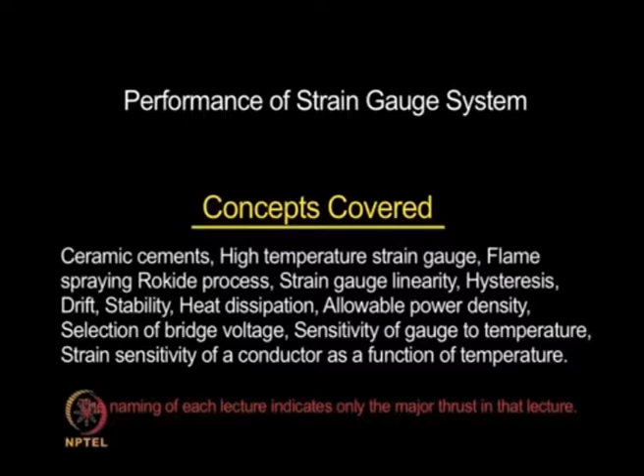Let us continue our discussion on strain gauges. We have looked at in the last class strain gauge as a system consisting of the metallic grid supported by a carrier and which is bonded to the specimen by a suitable adhesive.

We have looked at quick setting adhesive like cyanoacrylate. Then we looked at epoxy, which is meant for sophisticated installations like in transducers, where you need to provide a very thin bond line, and also it should hold up for longer periods of operation. Then we looked at polyester adhesive.

Now, let us look at the ceramic cements. They are useful for high temperature applications or in radiation environments. Nuclear power is becoming very important, so you need to live with radiation environments in such installations, and in such applications organic adhesives cannot be employed.

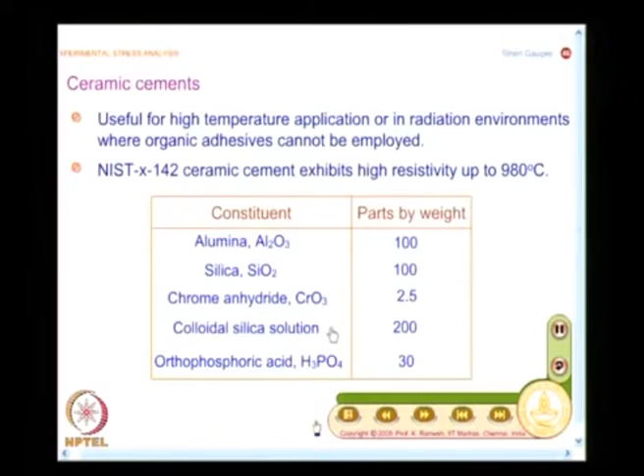So, what you have here is a blend of ceramic powders such as alumina and silica combined with phosphoric acid, mixed with a solvent such as isopropyl alcohol and an organic binder, to form a liquid.

So, essentially you have this ceramic available as a liquid, so that it is easy for you to apply it by a spraying process.

On the specimen you provide a pre-coat of the ceramic cement. After application, it is fired to form a thin layer between the gauge grid and the component. So it is a very elaborate process; you need proper training to handle this kind of special cement.

Once you form a thin ceramic cement layer on the specimen, you place the gauge, and the gauge is also very special—we will have a look at it a little while later. You have to remove the carrier of the gauge and place it on the thin layer of ceramic.

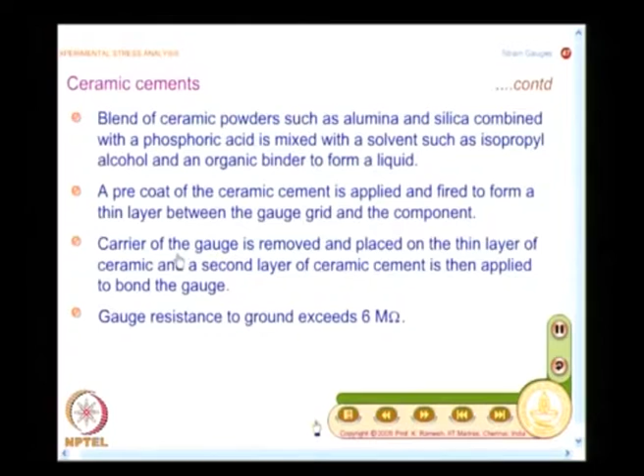So what you see here is you need to have a strain gauge such that its carrier can be removed. You have an example of how such a gauge can be constructed—I have a sketch here.

I essentially have a wire type strain gauge, and you have a Teflon tape carrier which could be peeled off. Let me make a decent sketch of this. Gauges are constructed with a grid fabricated from wire, which is mounted on slotted carriers made of glass reinforced Teflon tape.

The reason you have the slotted type is that you put a layer of ceramic, then the strain gauge would be bonded. At that time you can remove this Teflon tape, then again apply a coat and complete your installation.

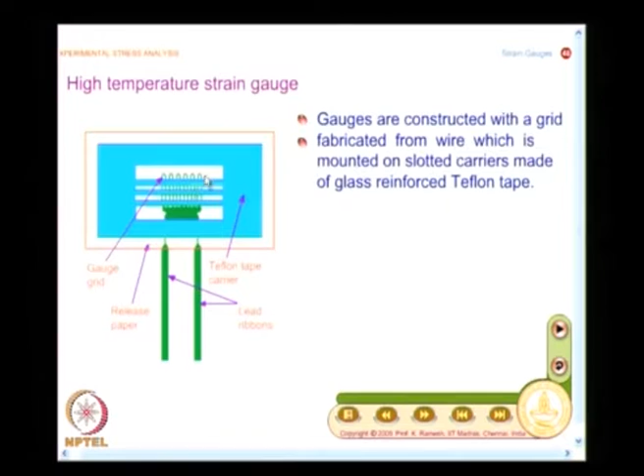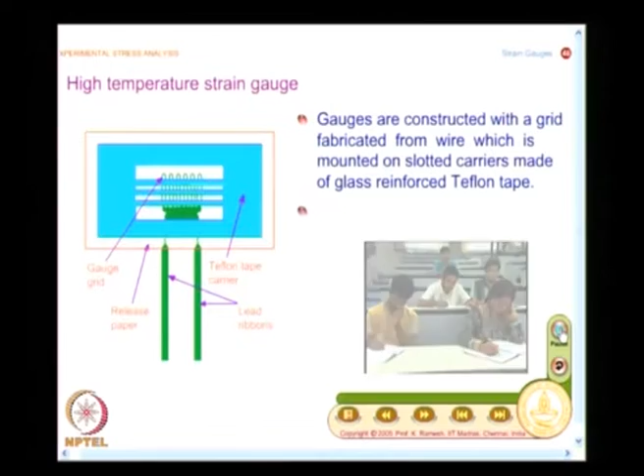In order to apply the ceramic, you need a special gun. As mentioned earlier, the tape is removed after the grid is secured to the component. So it is a very involved process, not like simple strain gauge bonding. Since you work at very high temperatures, you need a systematic procedure.

Here we look at one family of strain gauges used for high temperature. There are also weldable strain gauges which we won't focus on now, but you should know that for high temperature applications there's another form of strain gauge that can be welded to the base material. Here we only look at forming a layer of ceramic, removing the carrier, and putting another layer of ceramic so the gauge is properly bonded, and such gauges are available commercially.

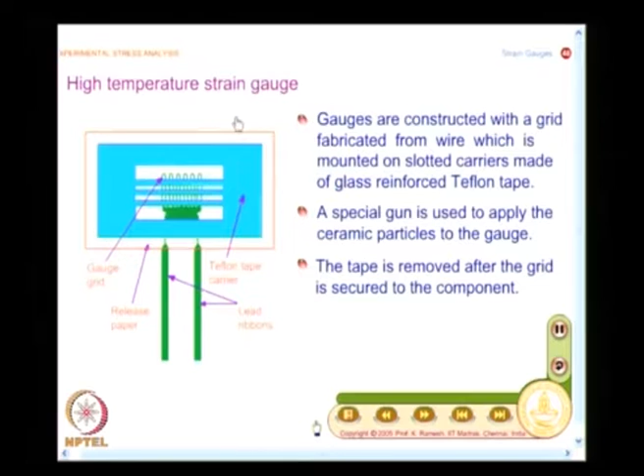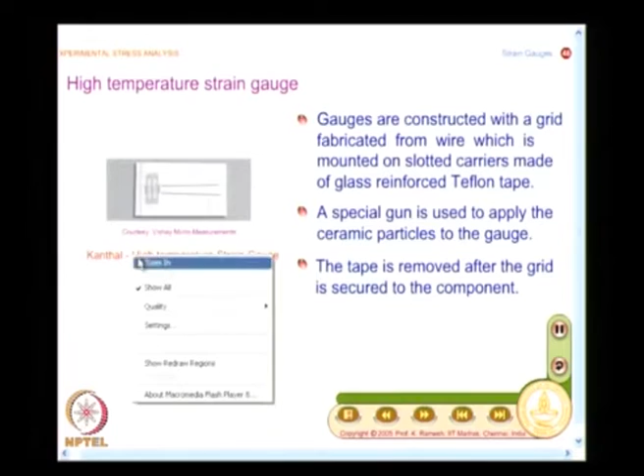This is given by Vishay Micro Measurements, and they have what is known as Kanthal, meant for high temperature strain gauges. You can see the slotted Teflon tape carrier, and the strain gauge available like this. So this can be used to put the ceramic cement, remove the carrier, and put another layer.

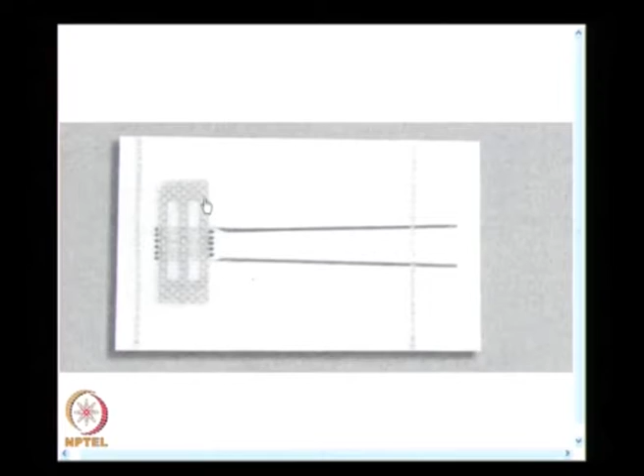So essentially you will have only a ceramic base and a metallic foil. There is nothing like a polymer that comes in between, because at such high temperatures they will not withstand it, they will disintegrate. So in order to make sure your instrumentation is good at that high temperature, you form a ceramic layer.

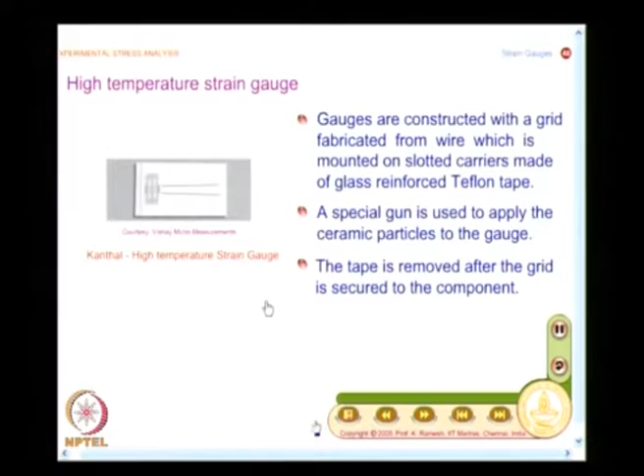And how do you do this application of ceramics? You have a special gun which is a modification of your gas gun, and you feed the alumina as a rod. So the ceramic material in rod form is fed into the combustion chamber.

And because of the high temperature, the rod decomposes into softened, semi-melted particles. You can actually have a closer look at this. You have the ceramic rod, oxygen and acetylene, and at the outlet of the gun you get an atomized spray of ceramic particles. That is what you get.

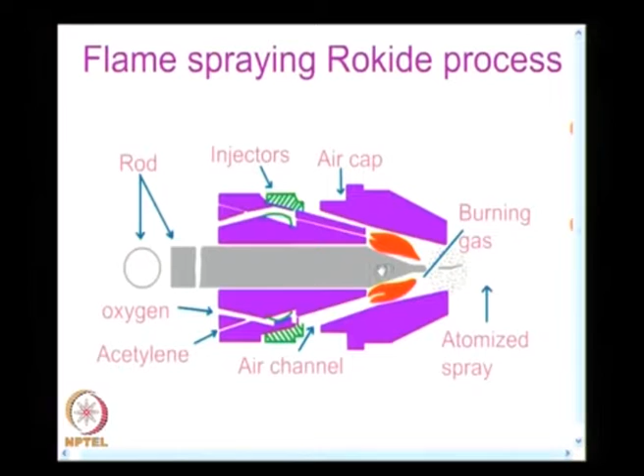The idea is to get a fine spray and spray it on the specimen, and by changing the rod you could apply it for different temperature ranges, that also we will see. The material you use for the rod, if you change it, you can work for different temperature regions.

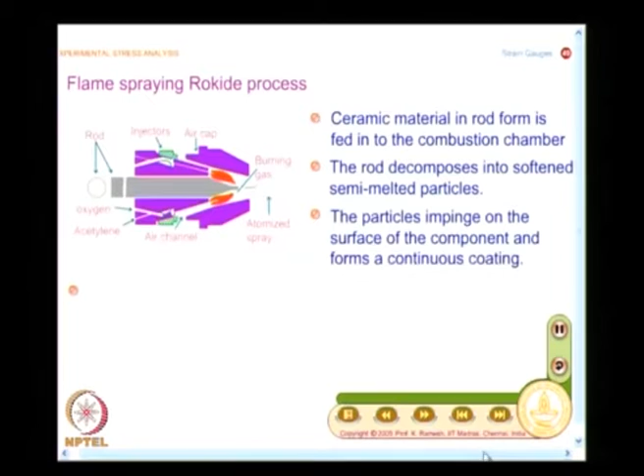What you find here is you use a pure alumina rod for high temperature applications. On the other hand, if you use a rod which has 98% alumina with 2% silica, you could use it for applications below 425 degrees centigrade.

So in this process the ceramic material in rod form is fed, and you have an atomized spray of these particles, which impinge on the surface of the component and form a continuous coating. It is again a very special process, not like a simple spray gun. You have to handle it carefully to form a thin layer of ceramic.

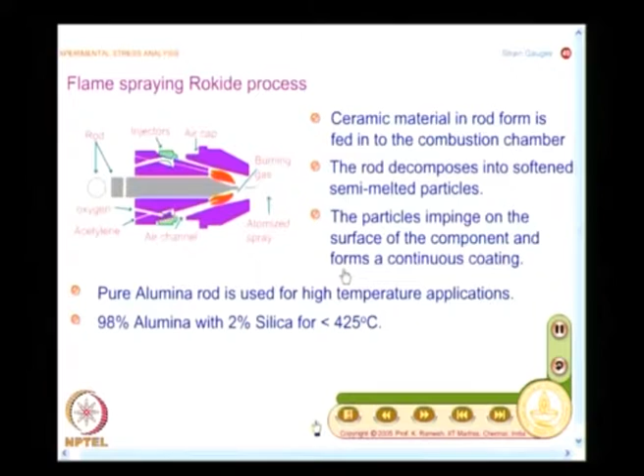Now what we have looked at is the strain gauge system, consisting of the metal foil, carrier and the adhesive. Now we will have to look at how this system functions in actual practice, what considerations we need to look at while selecting the constituents of the system. Depending on the application, I must select a suitable alloy, suitable carrier, and also a suitable adhesive.

For high temperature, the selection is very simple. You know you can't use epoxy or polyester as adhesive, you need to go for ceramic cement. But even from stability, hysteresis, or linearity point of view, the constituents play a role. That is what you have to look at.

And I said strain gauge selection is a very important aspect that you need to learn. For strain gauge selection, you need a background on what is the role of each of the constituents. Though this information is descriptive, it is also needed from the point of view of selecting the appropriate system for your measurement.

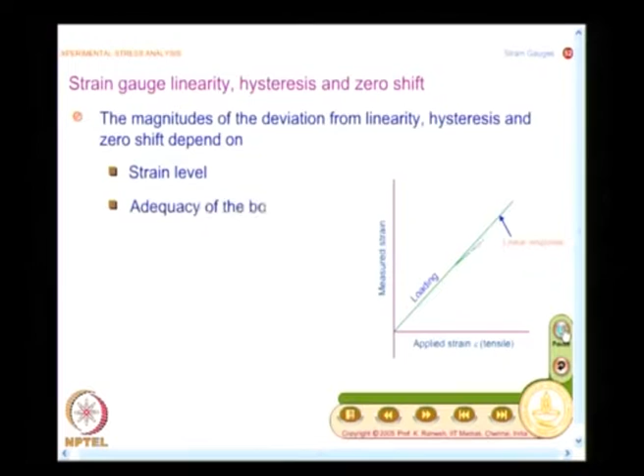We have already looked at how you need to worry about strain gauge linearity, hysteresis and zero shift in any strain measurement application. And what happens to the magnitudes of these, like deviation from linearity, hysteresis and zero shift? They all depend on various factors.

What is the strain level at which I operate, whether the bond is adequate so that strain transfer from the specimen to the strain gauge is effectively carried out. And if you look at the property of the alloy, what is the degree of cold work of the foil material, and naturally the viscoelastic characteristics of the carrier material.

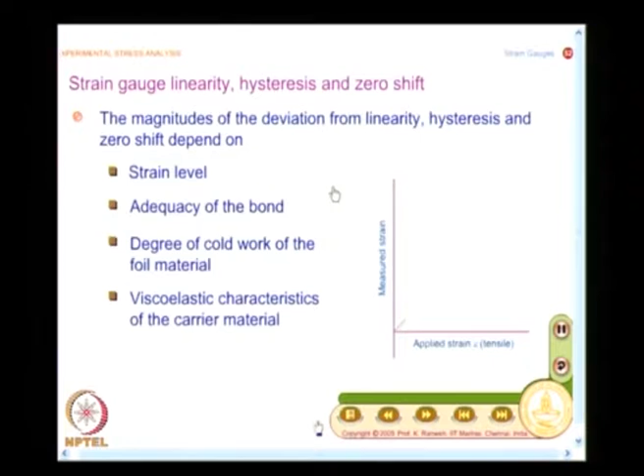Deviation from linearity and hysteresis become very important in transducer applications, and by changing the suitable carrier, it is possible to improve some of these aspects. That is why you should view the strain gauge as a system consisting of the alloy for the strain gauge metal foil, the carrier, and the adhesive. Selection of all three are interrelated, and depending on the application, you should select appropriately.

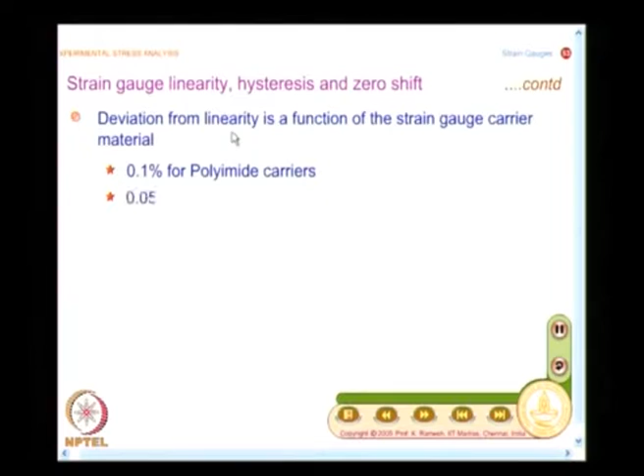Suppose I want to minimize deviation from linearity, then I choose an appropriate carrier. What you find is polyimide carriers give deviation of about 0.1%. On the other hand, if I go for epoxy carriers, it is just half of it, about 0.05%. But polyimide is easy to handle, it is a plastic, even a beginner can handle it. We have already looked at epoxy being brittle, which is recommended for transducer applications.

So, when I want to improve linearity, hysteresis, and zero shift, I need to go for sophistication. It comes with a price, it does not come freely. We have also looked at how strain level plays a role, and what is observed is that hysteresis and zero shift strongly depend on the strain range, and that is what is illustrated in this graph. You can have a look at it.

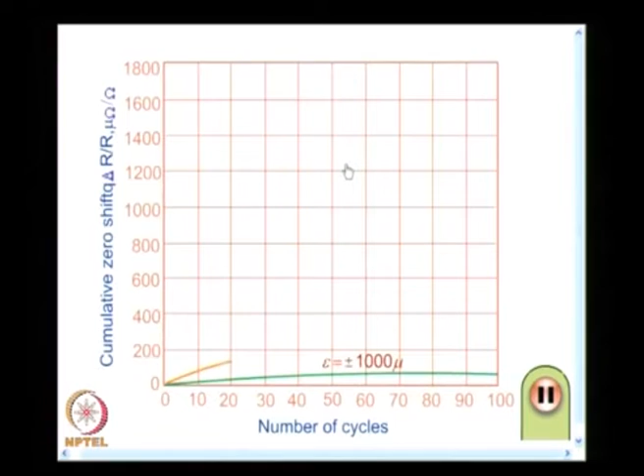On the x axis I have number of cycles, and on the y axis cumulative zero shift. The graph is plotted for a strain range of plus or minus 1000 microstrain, then another for 1500 microstrain, and the third for plus or minus 2500 microstrain. It is very high, going beyond the elastic region, because 2000 microstrain is the strain range at which plastic deformation takes place. If you closely look, there is an initial slope, and as the number of cycles increases you have a gradient, and then it becomes horizontal. Make a note of it.

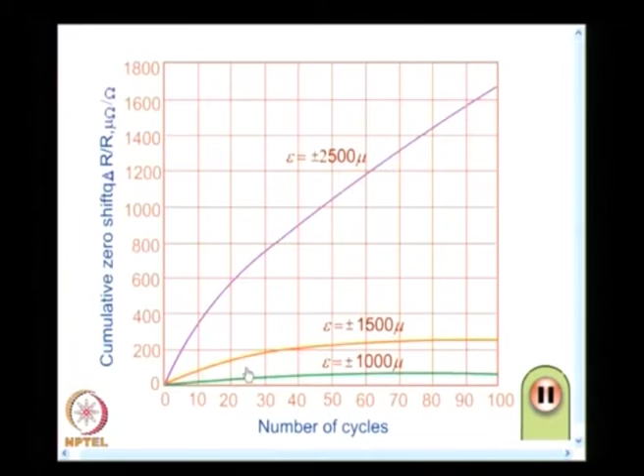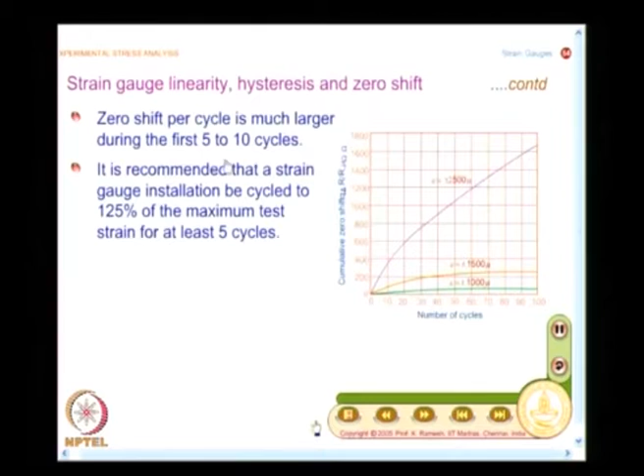How do you use this information for strain gauge instrumentation? What is the recommendation? We find that the zero shift changes in the initial few cycles, so the zero shift per cycle is much larger during the first 5 to 10 cycles, that is what the graph shows.

So it is recommended that a strain gauge installation be cycled to 125% of the maximum test strain for at least 5 cycles. You do not go and make the measurement as soon as you paste it and the adhesive is completely cured. The advice is to do a strain cycling, particularly when making a transducer, you calibrate at the factory, loading it beyond 125%, doing a few cycles, ensuring the system as a whole is stabilized, then release it for actual measurement. Even in regular test conditions, it is recommended that you do a strain cycling before final measurement.

Where does this knowledge come from? You find the zero shift is a function of the cycle. Initially the zero shift is more, after about 10 or 15 cycles it stabilizes. So the recommendation is to do at least 5 to 10 cycles, and more is well and good. That is what you get from observing zero shift as a function of the strain range.

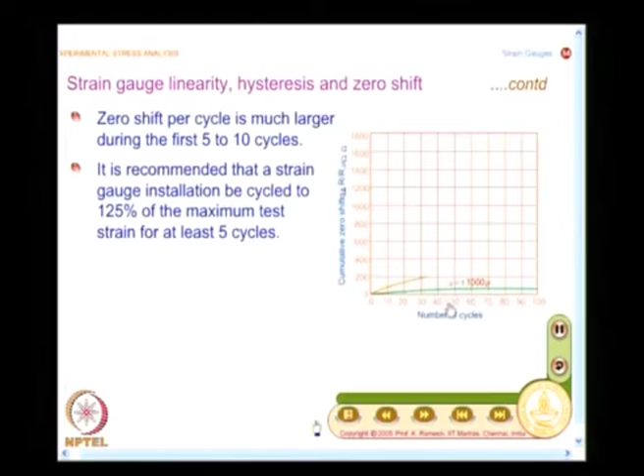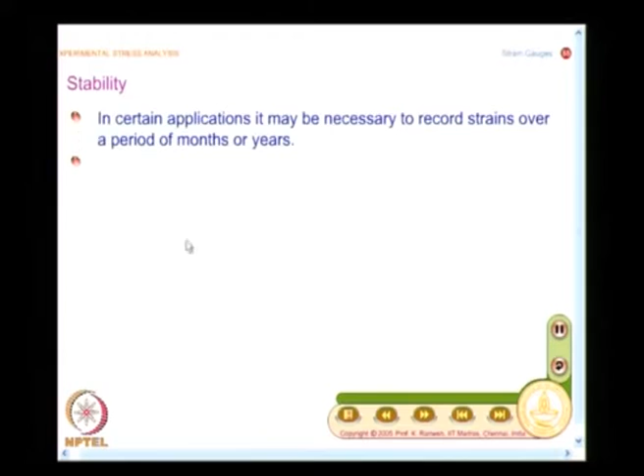Now we get to another important issue in all strain gauge installations, that is stability. This becomes very important in applications where you have to record strains over months or years, not just for immediate requirements. Suppose I want to monitor structures like dams and bridges, we may have to do it for long periods of time. In such applications, there may not be an opportunity to unload the specimen and recheck the zero drift, so it is better to select a system that is stable for such applications.

When I say the strain gauge system, you have to choose the proper alloying material of the strain gauge, the type of carrier, as well as the adhesive. All three go together. We will see a nice example where people have conducted experiments over a long period of time with different alloys, backing, and adhesive. When you change one after another, you find there is significant improvement.

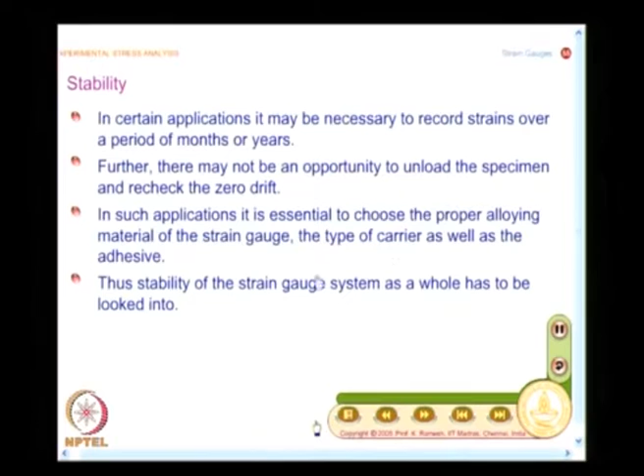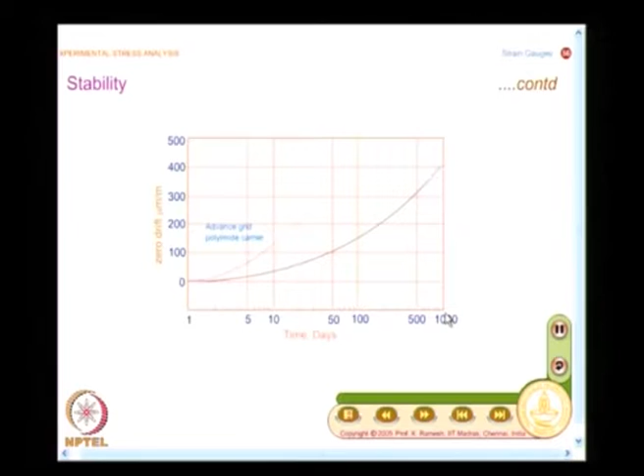I have one graph for strain gauge alloy Advance grid with polyimide carrier, and the second graph is the same grid material, again Advance grid, encapsulated with phenolic glass carrier. The carrier is made different. You have the encapsulation and the phenolic glass carrier, which is much better than the polyimide carrier.

So what you find is a very significant zero shift in a simple Advance grid with polyimide carrier, which is substantially reduced when you just change the carrier material.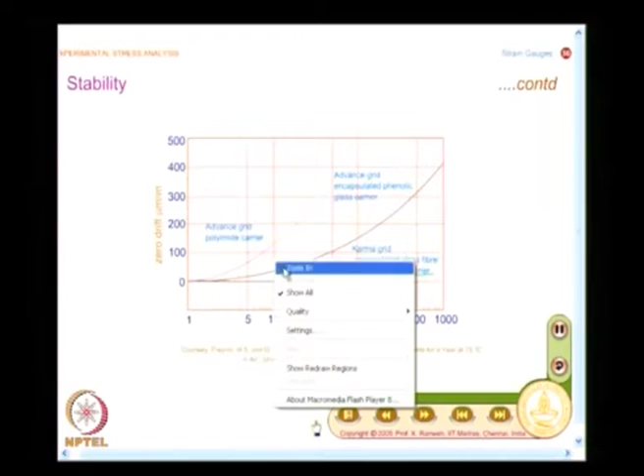And the third graph, which is almost close to zero, you get from Karma grid encapsulated with glass fiber epoxy phenolic carrier. So what you find here is, by changing the strain gauge alloy, the system as a whole has improved. From the first graph to second graph, the carrier has indeed improved, and further improvement is possible by changing the alloy itself.

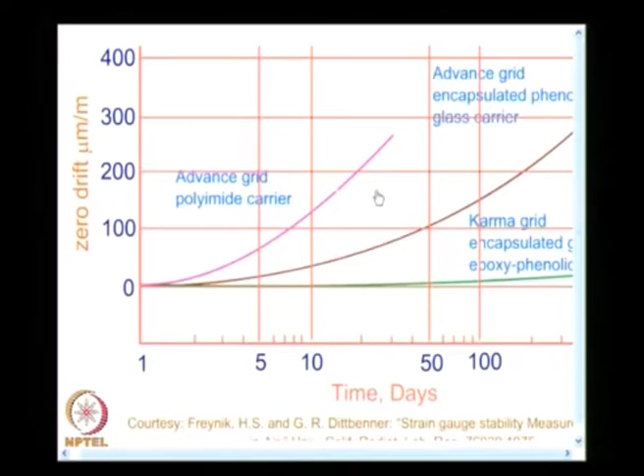That is why I said you need to look at the strain gauge as a system, and you have a summary of the observations from the graph, which is available in the next slide.

What you find here is a zero shift of the order of 270 microstrain observed after 30 days for Advance alloy with polyimide carrier. If you look at the installation, it was waterproofed well, so there was no difficulty of moisture entering and deteriorating the strain gauge bonding. What people found was that the carrier was not taking the load properly, so there was stress relaxation which caused the drift.

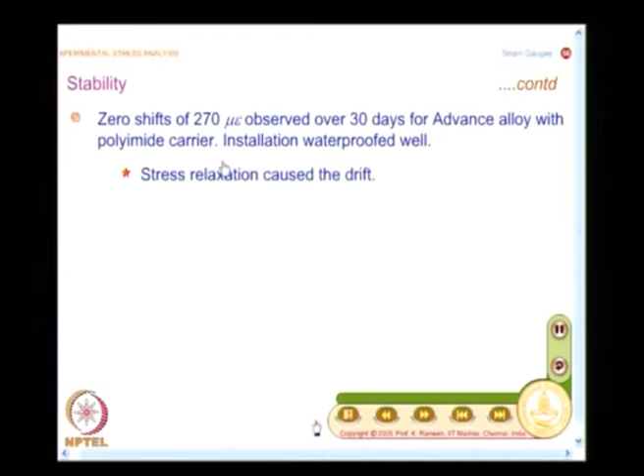When you are making a measurement, 270 microstrain is very high. If the zero shift itself is 270 microstrain, what level of confidence will you have in the final measurement? So for a given application, you need to find out whether you have selected the right combination of strain gauge alloy, carrier, as well as adhesive.

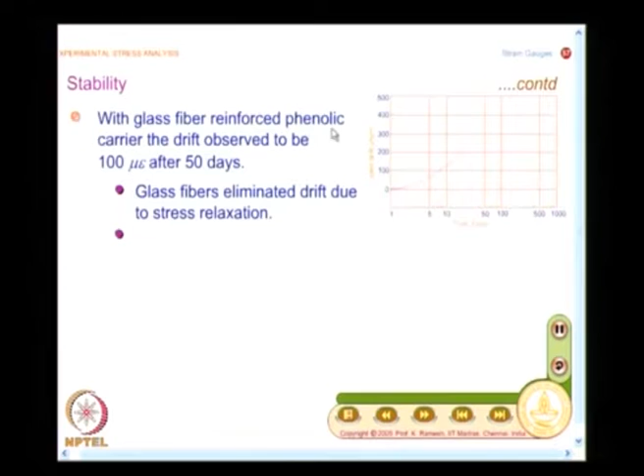You see this in stages: initially we saw 270 microstrain, which is very bad. Now I go and improve the carrier. Instead of polyimide, if I use a glass fiber reinforced phenolic carrier, the drift has reduced from 270 microstrain to 100 microstrain even after 50 days.

In fact, that is what is listed in this graph. This is about 270 microstrain at the end of 30 days, and at the end of 50 days you find only 100 microstrain, just by changing the carrier for the strain gauge. So whatever the stress relaxation was, the glass fibers eliminated that effect.

The whole test was done at 75 degrees centigrade. We have already noted that Advance alloy is a good strain gauge alloy for room temperature applications, and they also noticed that the drift was due to instabilities in Advance alloy at the test temperature of 75 degrees centigrade. So once you notice this, change the strain gauge alloy to Karma grid, but retain the same carrier with encapsulating glass reinforced epoxy phenolic carrier.

Zero shift was only 30 microstrain after 900 days. That means it is almost like 3 years, 2.5 years. For 2.5 years, absolutely no problem in your strain measurement.

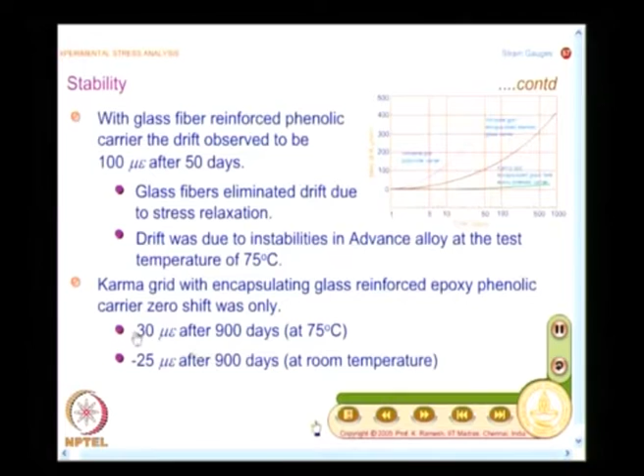And what backing you are using and what adhesive. Here the adhesive role is not emphasized that much, but what you find is Karma grid has worked at 75 degrees centigrade quite well. Even at room temperature, instead of positive drift, it has a negative drift of minus 25 microstrain. So for long term measurements, Karma grids with glass fiber reinforced epoxy phenolic carriers with a well cured epoxy adhesive system is recommended.

So I said that adhesive has not been mentioned, but what you find here is for any sophisticated applications, people go for epoxy adhesive, and you should also ensure that the gauge installation is waterproof well. You do this to minimize moisture penetration.

Not only this, we have already seen in a strain measuring instrument, I need to have completion resistors. The bridge completion resistors should be hermetically sealed to ensure stability of the bridge.

The idea is you have taken care of the strain gauge installation, you have selected the right type of alloy, carrier as well as the adhesive. But now you have to make the measurement using a Wheatstone bridge, and the Wheatstone bridge has completion resistors, because in many applications we may do only a quarter bridge. The other 3 resistors are there in the Wheatstone bridge, and these have also to be waterproofed well, because you are trying to make the measurement for long durations.

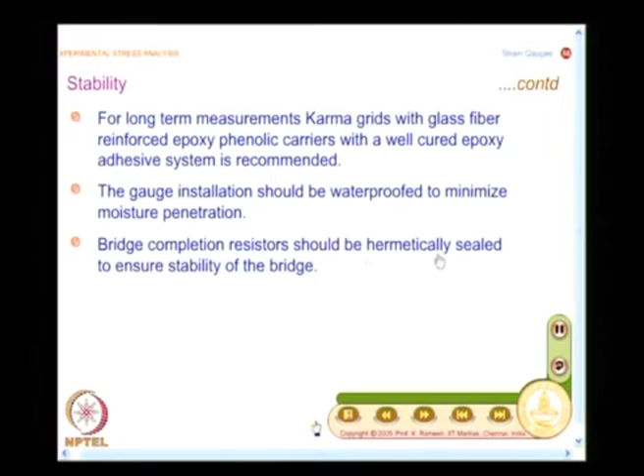Now we move on to one of the other important aspects in strain gauge instrumentation, namely heat dissipation.

When you come to thermal effects, you need to deal with 2 effects. One is working at moderately high temperature than room temperature. Suppose I want to measure strains on IC engines, I may have to put it at the IC engine block, and the temperature will be higher than room temperature. In such applications I should measure the temperature by a thermocouple, and then either look at thermally induced apparent strain and subtract it, or put another strain gauge at similar temperature and make it a half bridge to handle the thermal effect. This is one type of thermal influence.

The other type of thermal influence you need to worry about is heat generation due to I squared R loss. This is very subtle. In many applications, if you are working at high temperature, compensating for that you may do more routinely, because that is very obvious. What is subtle is that because current flows through the conductor, the strain gauge itself gets heated.

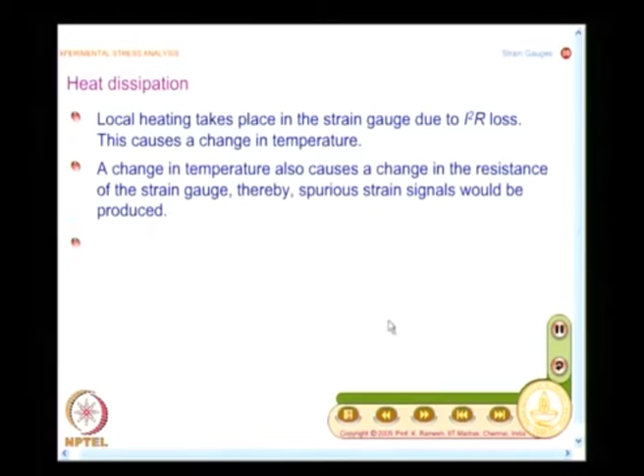And why do we need to worry about this? Whatever is the I squared R loss causes a change in temperature, which in turn causes a change in the resistance of the strain gauge, thereby spurious strain signals would be produced. So I need to eliminate these spurious signals, and this is the most challenging aspect of strain gauge instrumentation.

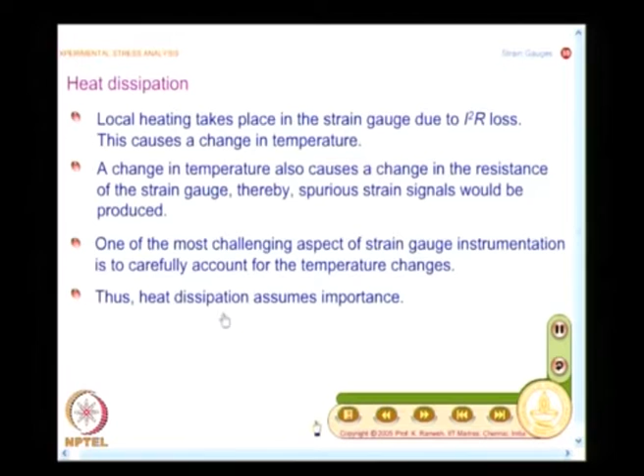And from this point of view, heat dissipation assumes importance. Whether you like it or not, the strain gauge gets heated, and you need to look for how to dissipate this generated heat. What are all the parameters I have to look at, so that I minimize any temperature rise because of buildup of heat due to I squared R loss. That is the focus.

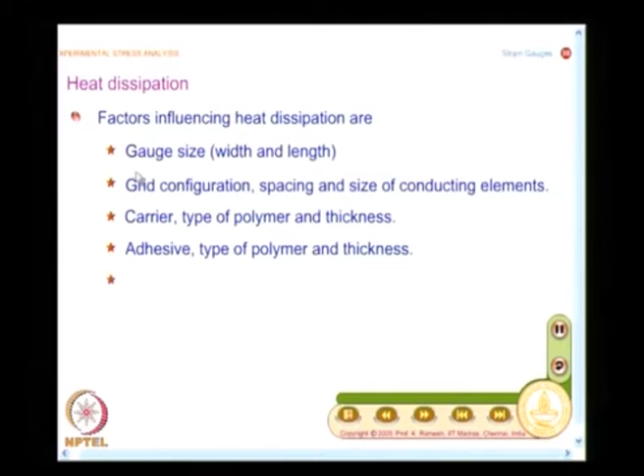It depends on various factors. The first factor is the gauge size. If you look at the catalog of strain gauges by manufacturers, you will find gauges of various width and length to suit different applications.

The second aspect is the configuration of the grid, and the spacing and size of the conducting elements. I mentioned I can have a rosette with strain gauges separately aligned, or stacked. From a measurement point of view, considering the approximations involved in idealizing the point of measurement, stacked rosettes are better. But stacked rosettes bring another problem: heat generation will be much more than in a normal rectangular rosette, where they are kept slightly away from the point of interest. They meet at the point of interest, but are not exactly on the point for which you want to make the strain measurement.

So grid configuration matters, as well as the type of carrier, the type of polymer, and its thickness. You can say similar things for the adhesive. The specimen material also plays a role - am I working on copper, steel, or plastics? The specimen material matters.

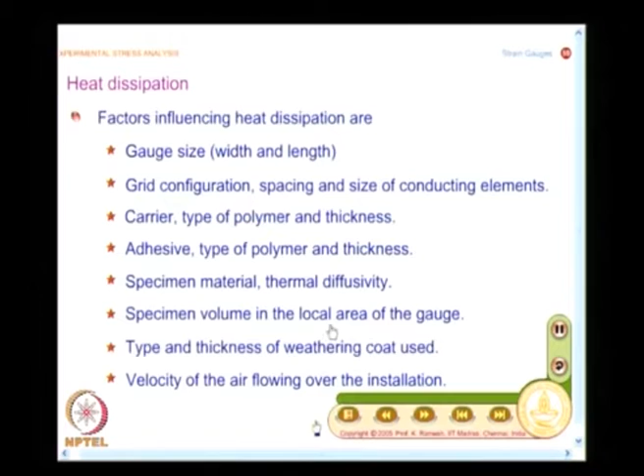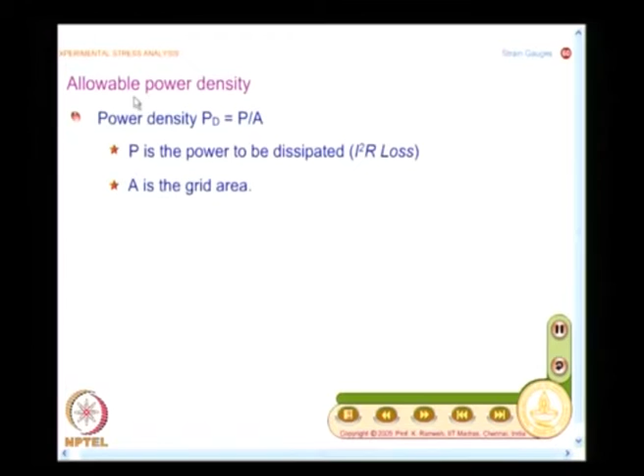The manufacturer also looks at it differently - they recommend the allowable power density. So you have power density defined as P by A, where P is the power to be dissipated, calculated from I-squared R loss, and A is the grid area.

Later we will look at selection of strain gauges, where we'll see a variety of patterns with different grid areas. From charts, you'll know that for a given application and power density, what kind of grid pattern you can select. So I need to approach the problem scientifically - for a given specimen material and thickness, there is a power density that it can safely operate at.

For a heavy aluminum or copper section, the power density permissible ranges from 0.008 to 0.016 watts per millimeter squared. For heavy steel sections, the power density value reduces, and for thin steel sections it reduces further. For poor conductors like fiberglass, glass, ceramics, or unfilled plastics, the permissible power density is almost close to zero - it is very small.

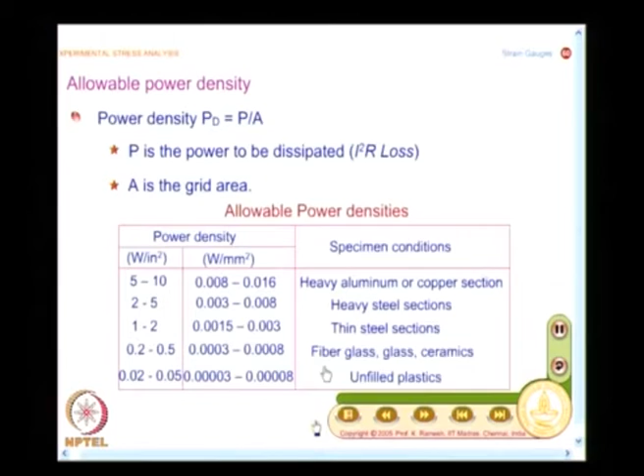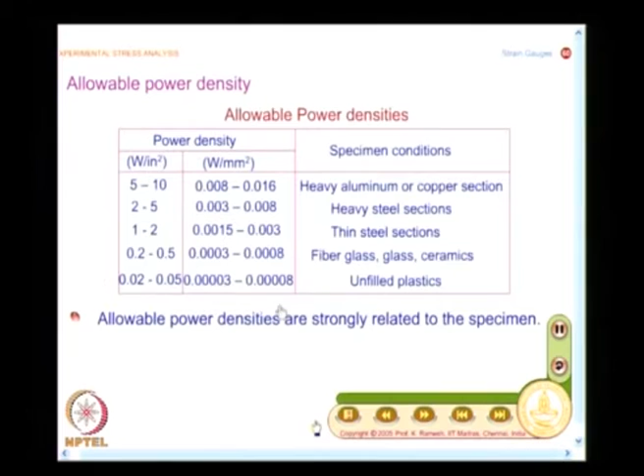So, this is what you have to look at. Allowable power densities are strongly related to the specimen. That is what this table essentially brings out. So, in a strain gauge installation, I said strain gauge as a system consisting of grid alloy, carrier and adhesive. Now, you find from heat dissipation point of view, even the specimen material dictates this.

And the manufacturer supplies you with such complicated graphs. I will try to explain it in a very simple fashion. So, on the x axis you have a grid area. I will also enlarge it a little while later. First, on the x axis, note that you have a grid area.

On the y axis, you have the bridge excitation voltage. So, my idea is to find out the excitation voltage, so that I satisfy the power density requirement. And what you have here is, on the graph you find slanted lines. These lines indicate different values of power density.

So, if you look at it zoomed, what I find here is a line for 0.01 watts per inch square, or 0.016 kilowatt per meter square, and the power density increases in this fashion. So, if I know for a particular specimen material only a particular power density is permitted, then this tells me what kind of gauge patterns which I can choose.

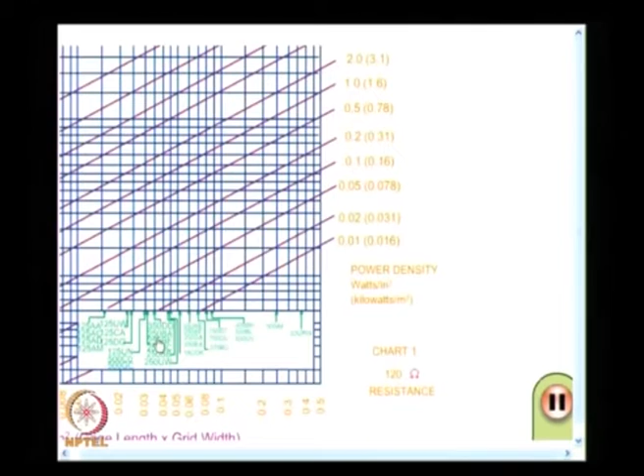I suppose you are able to see these letters. If not, I will be able to enlarge it, and what you find here as 250 AE, 250 AF, they indicate first the length of the gauge length expressed in mils, and AE, AF, DA, EA all pertain to particular strain gauge manufacturers' classification of the grid pattern.

You have so many grid patterns, they churn out many different grid patterns, and for each one the manufacturer will provide you a graph like this for you to select the suitable grid pattern and also decide on the selection of bridge excitation voltage.

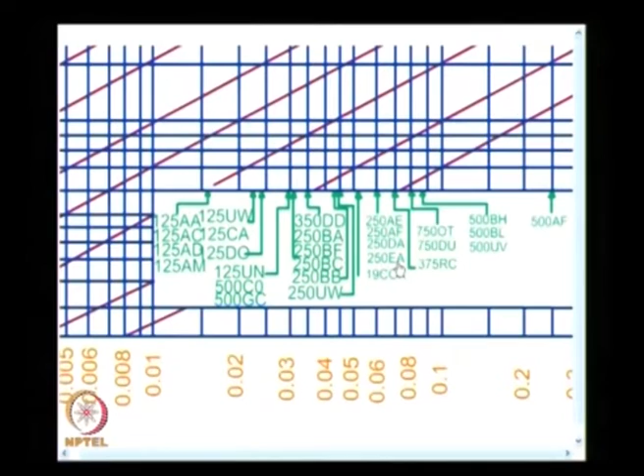And if you look at the graph, you have a cluster of gauge grid identification here, you have another cluster of gauge grid identification here. This is essentially grid area. You could have a wider grid, you can have a narrow grid, you have different types of patterns. Your measurement application will decide whether you need a wide grid or narrow grid, all that decision you will have to take.

And if you also look at this graph, it is available for 120 ohms, and this is a particular graph for 120 ohm strain gauges. Suppose I go for 350 ohm strain gauges, these power density graphs get shifted. That means I can afford to apply a higher voltage for the same power density if I use a higher resistance strain gauge.

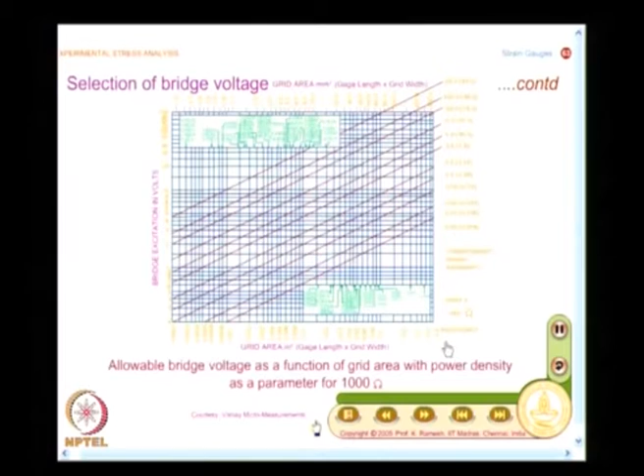And you also have another graph for 1000 ohms. This is just to give you an idea, such selection graphs are available from the manufacturer.

So, how do I go about selecting the bridge voltage? If you look at most commercial strain indicators, they use bridge voltage between 3 to 5 volts. Small gauges mounted on a poor heat sink result in lower allowable bridge voltage.

So, that is the reason when we had a discussion on selection of gauge length, we saw if the strain is varying linearly, the length of the gauge does not matter in interpreting the strain at the center of the strain gauge. Only when there is a nonlinear variation, then I need to worry about selecting a suitable gauge length.

I also caution that when you select a smaller gauge length, it is expensive, difficult to make, and in addition you need to worry about what bridge excitation voltage you can select, and also make special provisions for heat dissipation. You must allow a stream of air to cool the strain gauge installation, or pay some such special attention.

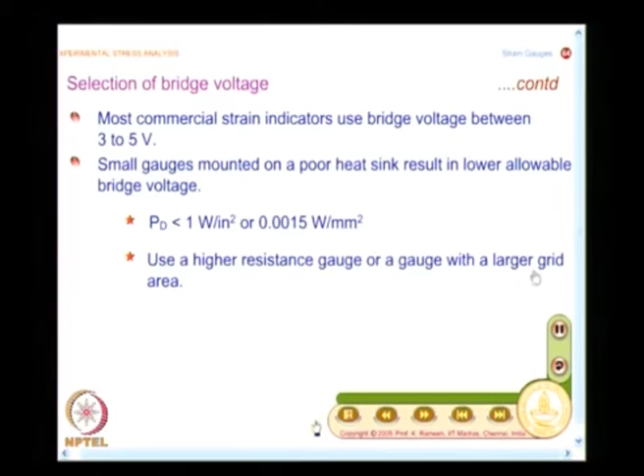And suppose you are unable to improve your heat dissipation from external means, you can at least think of using a higher resistance gauge or a gauge with a larger grid area. This is the kind of selection compromise. If I have a larger grid area, then I am deviating from idealizing measurement of strain at a point - I am measuring it only through an area. This is possible only when the strain variations are small as a function of distance. So selection compromises always exist. Without compromises, you will not be able to handle a problem.

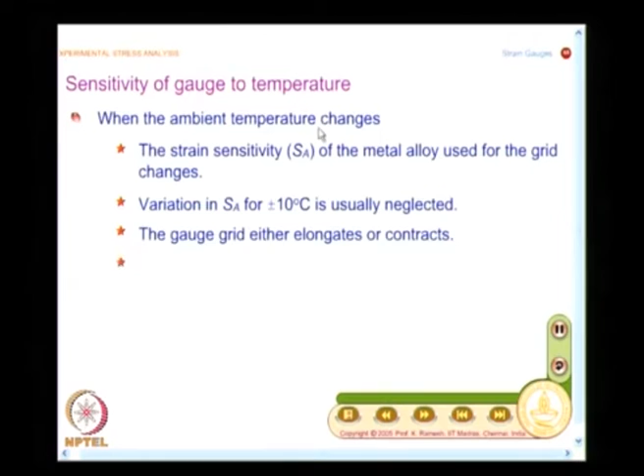Now, we have talked about influence of temperature in some form. We should also look at what is the sensitivity of the gauge to temperature. What happens when the temperature changes? The strain sensitivity SA of the metal alloy used for the grid changes. We will have to see how does it change, that is the question.

For simplification, for a change of plus or minus 10 degree centigrade, the variation of SA is usually neglected. It is obvious, depending on the coefficient of expansion, when the temperature changes, the gauge grid either elongates or contracts, and the specimen either elongates or contracts depending on delta T, and you also find the resistance of the gauge changes, because we have earlier written the change of resistance to original resistance as Sg into epsilon.

On similar lines, you write the expression St into delta T, and you label St as sensitivity of gauge to temperature. Sg is the gauge factor which is used in interpretation of change in resistance to axial strain. When I bring in the effect of temperature, I bring in another parameter called St, which has to be evaluated again experimentally.

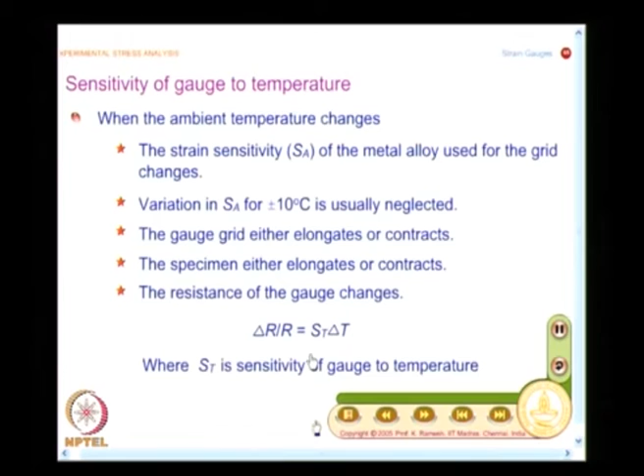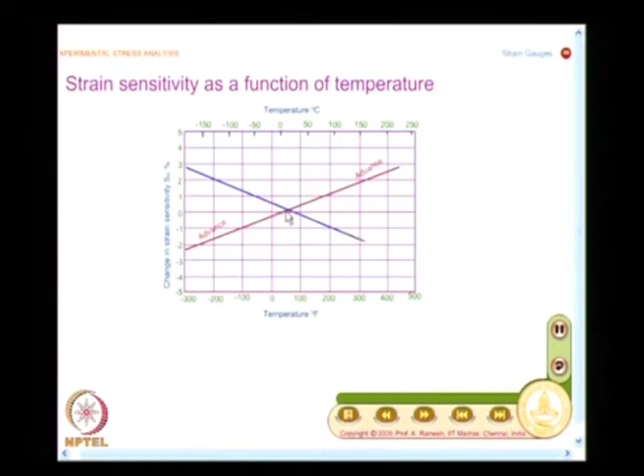How does this SA change as a function of temperature? What you find is, fortunately, it is a linear graph for popular strain gauge materials like Advance, Karma, as well as high temperature applications like nichrome, Armour D, as well as the platinum tungsten type of strain gauge alloy. Only for isoelastic is it non-linear. So if it is linear, it is good enough.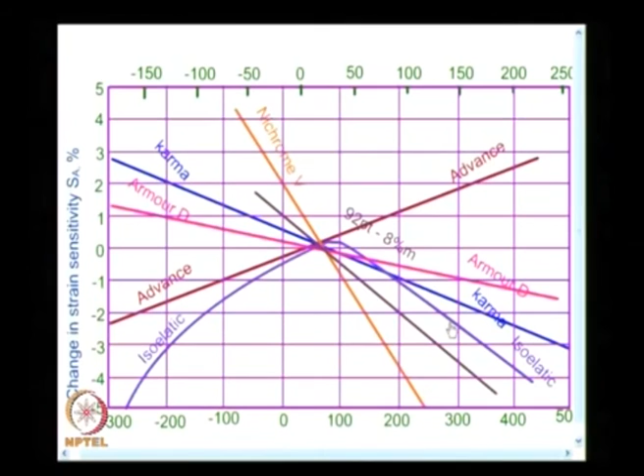So you just make a note that Advance and Karma vary linearly - that is what you need to worry about. It's a variation that is linear, fortunately it is linear, so we can do some kind of correction in that. What you find in quantitative terms is change in the strain sensitivity of the conductor as a function of change in temperature is 0.735% per 100 degree Fahrenheit for Advance, and minus 0.975% per 100 degree Fahrenheit for Karma.

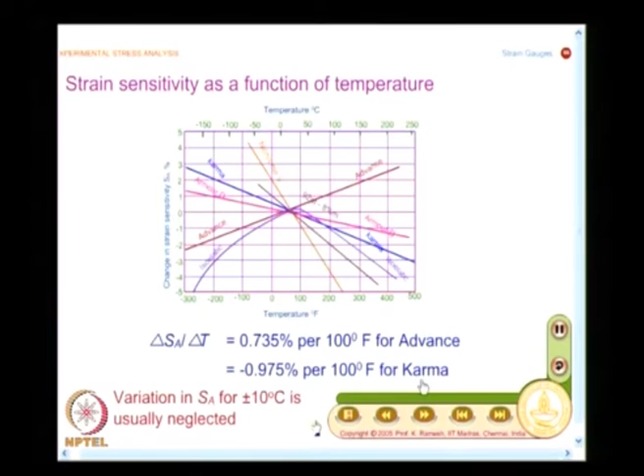So you have this data, it is possible because the strain gauge is constructed based on a conductor. So I need to know the conductor property, then I need to look at how this changes when I make it as a loop. So what we will look at is handling temperature information and segregating the change in resistance due to stress applied and temperature change - this is the most challenging aspect in strain gauge instrumentation.

So in today's class what we saw was we looked at how to use ceramic cements and what kind of strain gauge you need to use for high temperature applications. Then we moved on to performance analysis of the strain gauge system. I said you need to worry about deviation from linearity, hysteresis, as well as zero shift, and we found the constituents forming a strain gauge influence these aspects. We saw selection of the carrier influences the linearity, and selection of the alloy as well as the carrier and an appropriate adhesive can improve stability for a very long duration. So selection is very important.